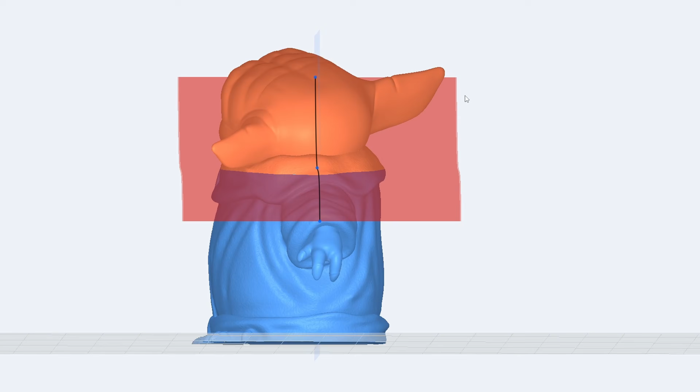This will be a quick video just to go over the updates to PolyCarver. If you're not familiar with PolyCarver, it's a tool I made to simplify the process of making curved cuts in 3D meshes before printing. I'll leave a card at the top and link to the video in the description.

Now let's go over what's new.

The first big update is that the Mac version is up and working. You'll be able to download it at the same place you can download the PC version.

The other big update is the mesh repair option. You can see this in the file menu. What this is going to do is fix any issues with the mesh when it's being cut or when it's imported, which was causing meshes to not cut properly and to not cap.

How long this takes will vary based on how complex your mesh is and how badly it's broken. For example, this Grogu mesh is about 500,000 polys. It's pretty dense and comes in originally pretty broken, so it takes about 2 or 3 minutes to repair.

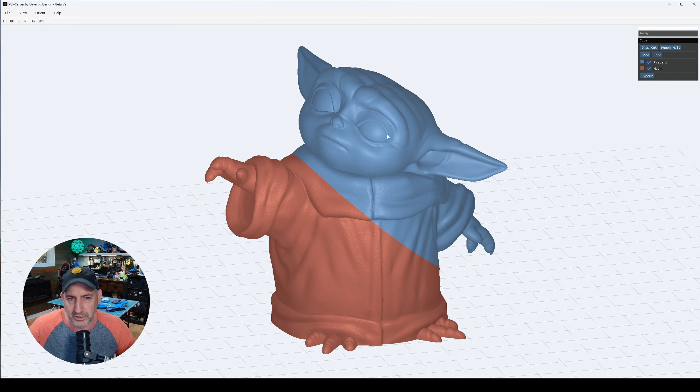But when I bring in a benchy, let's do that now. So you see here this pop-up when you load a mesh that is broken. It'll tell you what the issue is and ask if you want to repair it now or not.

If you don't repair it, you still have the ability to move around, but you just can't do anything. You can see up here that the menu is all grayed out and you're being asked to repair.

So if you just hit the repair button, it'll run through the process. Now the benchy, I think this takes 10 or 15 seconds - yeah, well, 6 seconds. So it's not that big of an issue. It's going to vary depending on your machine and what is going on with the actual mesh.

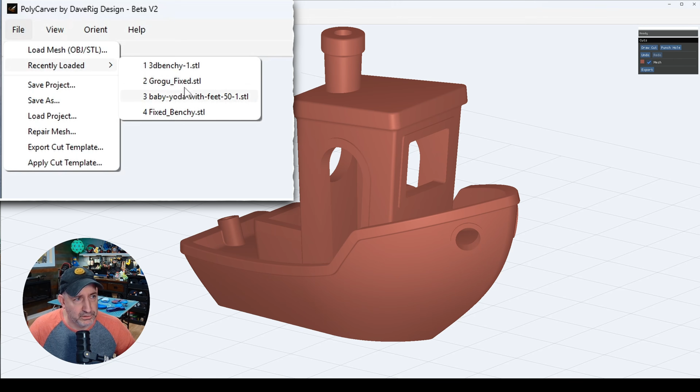Let me go back to another feature while here. I've added the recently loaded option, so it'll remember the last 5 meshes you loaded. It's also going to remember what directory you're in when you load a mesh, so you don't have to constantly be jumping back and forth when you're opening different files.

So first, let me make a cut here just to get 2 pieces. You can see I've also added a progress bar at the top, so you're not just waiting while it's processing - you can actually see what it's doing.

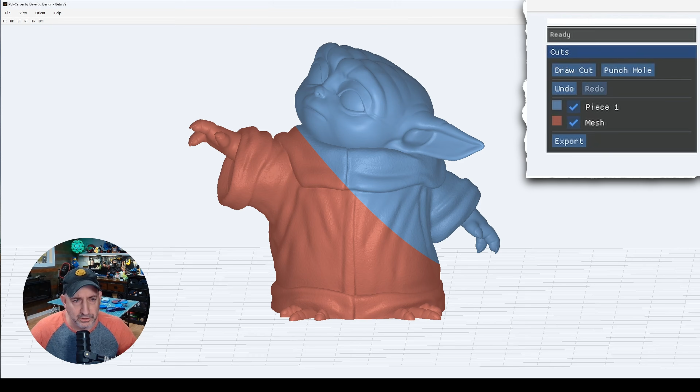But now that we have 2 pieces, I've also added that you can double click on the name and then rename each piece. And when exporting, it'll remember these names properly. Before, it was just reordering the names.

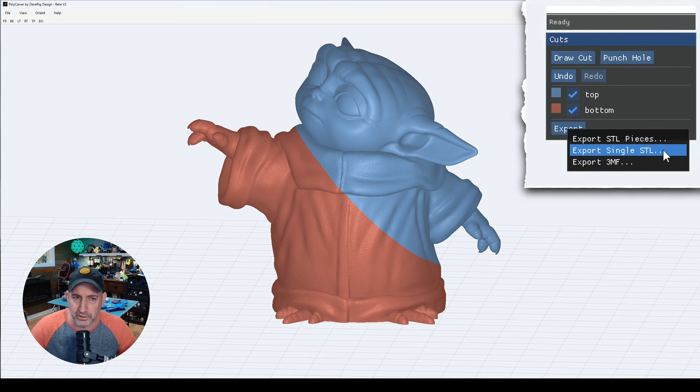Also on the export, I've added 3 different options. Export pieces is what the original had, where it'll just take however many pieces you have and export 1 STL per piece.

Export single will export it as 1 STL, but it'll keep all the different pieces, meaning that if you bring this into a slicer, it'll come in as one spot, but then if you select break to objects, it'll split it up to the pieces that you cut it to. And now you can also export to a 3MF file if you just want to load that into your slicer.

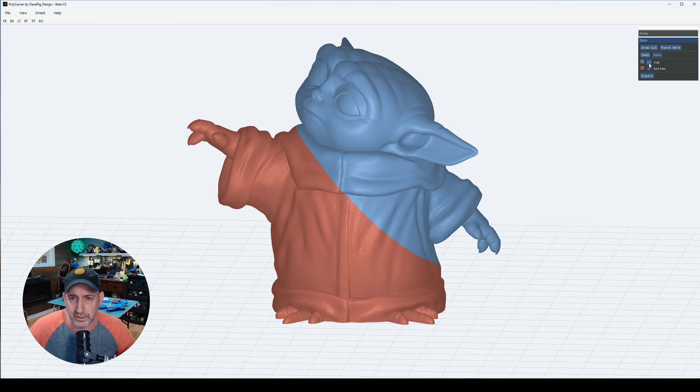Also, when exporting, it'll only export whatever is visible. So if you turn off a piece and now you export, it's only going to export the bottom - it'll ignore the top piece.

The other big addition is I added what I'm calling a hole punch or a cookie cutter that I think I'd mentioned in my last video. The way this works, when you select it, is just like the slicing option. You go into the punch mode and you have 3 options: circle, square, and polygon. We'll start with circle, and this, as you would think, draws a circle.

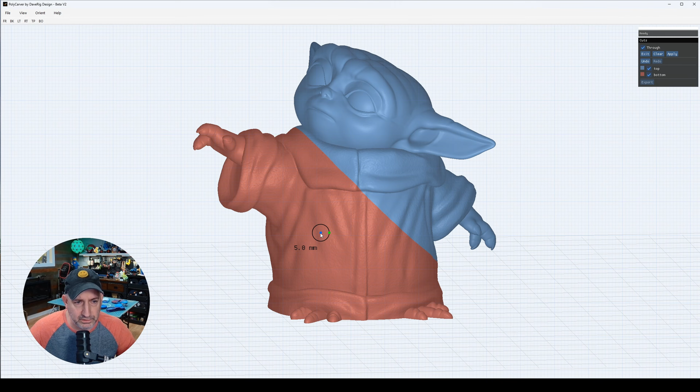Now the center dot, you can grab that and move it around anywhere on the mesh. And the green one, when you grab it and drag, it'll change the size of the actual circle itself, and you can see it's telling you what the physical diameter of that cut's going to be.

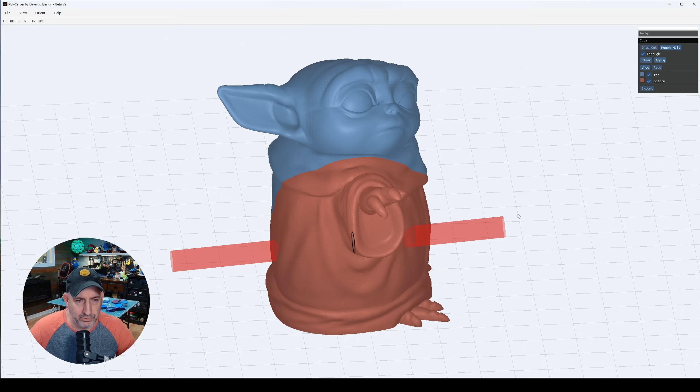So if we exit out, just like before, it'll draw where the hole is going to be punched through the mesh. But now I've also added the option to only partially cut through. So if we go back to, I can show you here, if I turn off the through option, so now it's only punching here.

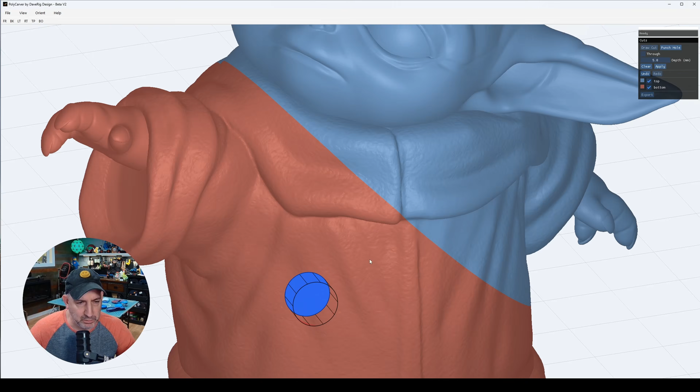It says 5 millimeters, so you can see the depth. That's a little hard to see from the mesh, that's why I'm drawing the kind of grid around it. I'll see if I can make this any better in the future, but right now you can kind of see how far it's going to punch into your mesh.

So if you wanted, you could come in here and change this, and you can see it update to how far. So now if we apply this, now you have just a partial hole punched in it.

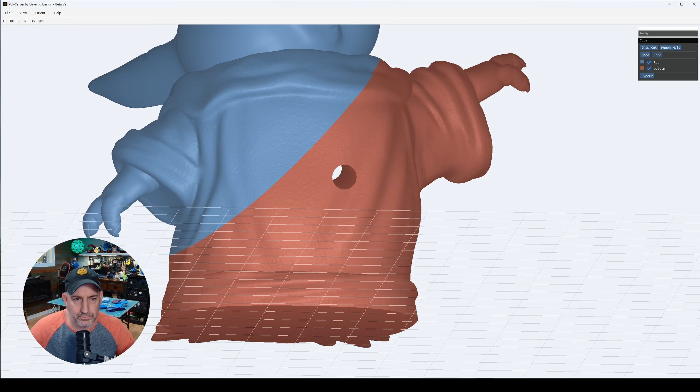Whereas if we go back and punch another hole but leave it all the way through, now it's punching a hole straight through.

Now looking at the square, it's very similar, except it draws a square as you would think. Same idea, you can grab the center part and move it around. You can grab each side and scale that to turn it into a rectangle, or grab the corner and scale the whole thing uniformly.

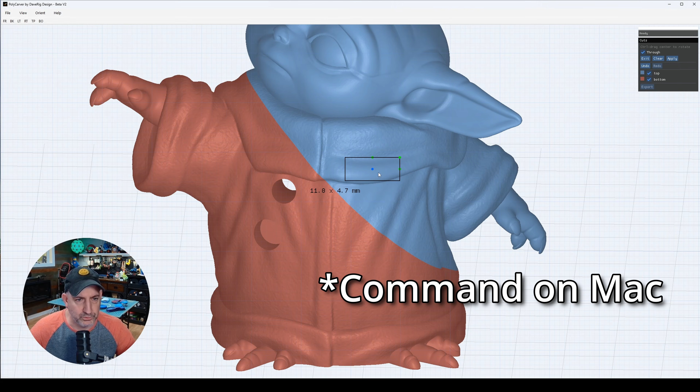Now if you hold control while clicking the center button and then scroll up and down, or move your mouse up and down, it's going to rotate it. So if you just grab the piece, you can move around the mesh, and then hold control, and as you move your mouse up and down, it'll let you rotate the mesh. You can move it like this.

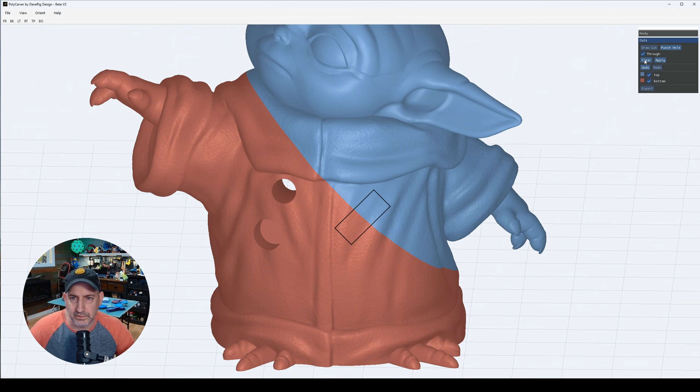And the same idea, that has the same through option. Let me exit, where it's going to do the same thing. It's going to project only partially into the mesh, or it'll punch all the way through. So we'll just apply that, and there you go.

And the last option is the poly, which lets you create a polygon as opposed to a geometric shape. So it starts as an octagon, or more than an octagon, but you can just grab each point and maneuver it wherever you want.

And if you click on this edge, it'll create a new point. And then also you can hit D to delete that point if you don't want it.

But this will let you, actually I think this is the example I mentioned in the comments of the other video. If you needed to, say, cut out an eye from a mask, from like a helmet or something, you can trace the exact shape you want, and if this is a solid mesh, say you only need to punch it 10 millimeters through, hit apply. Now you can see it punched out an eye.

So let me go over here and do it on this one. And then this one I'll let it go all the way through.

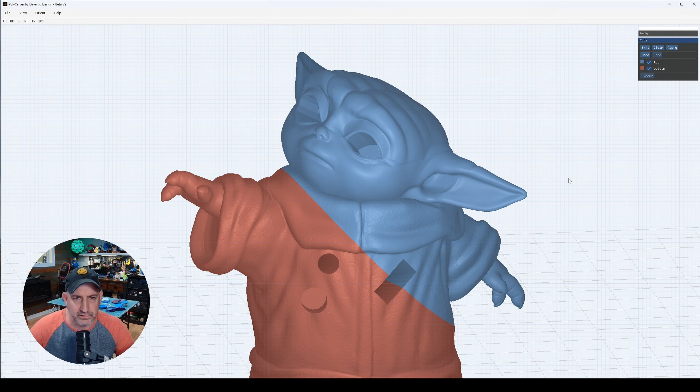Also, I don't know if you may have noticed when I was making the cuts, you can see this other grid pops up when you're in cut mode. This was something someone suggested, that when you're working on the same plane, you can have a grid as you're drawing your lines or placing your points, if you want to try to equally place things across, you have some kind of reference. And if you don't want that, you can always turn the grid off.

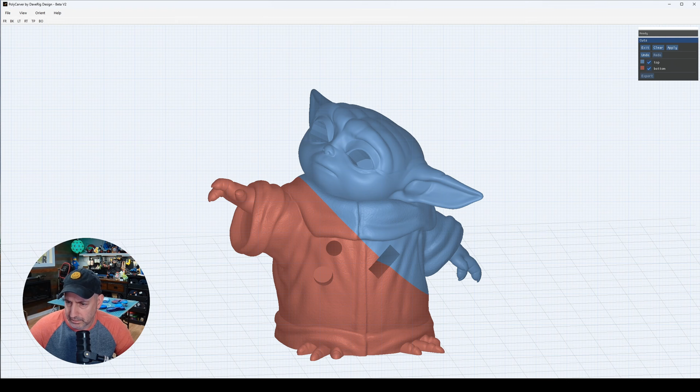Let me check my notes here. I think that is all the major updates. The big change really was the repair feature, because not only does it repair at the beginning, but it also repairs while you're cutting. I didn't get it in this case.

Let me load a Benchy and see if I can get it to pop up there, because sometimes when you're making cuts, it will create a problem when it's capping it, whereas before it would just show those errors. Now it'll actually repair the mesh after the fact.

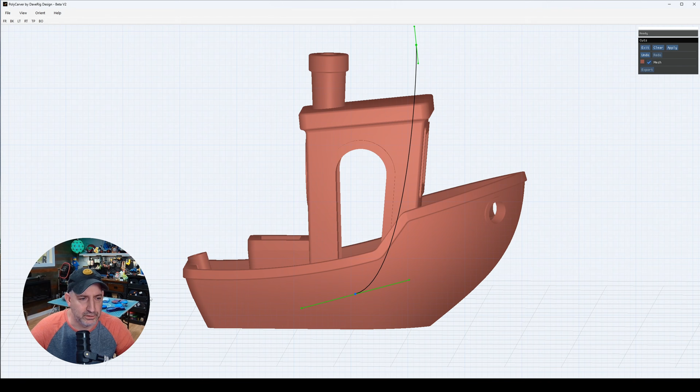So let's try, see if we can create an issue. There. So this cut, but then in the process of cutting it, it caused some issues with the meshes. So now it automatically detected that and will prompt you to repair. And again, you could say no and move around, but you can't proceed until you fix the errors before you can make more cuts.

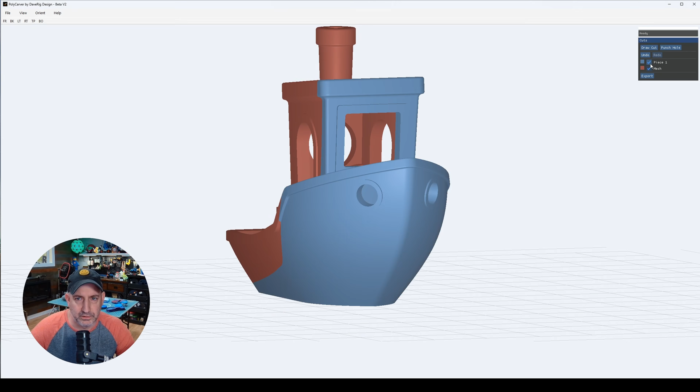There we go. So you can see both sides are correct. If you turn on the wireframe, you can see what's going on. So that's about everything.

For the Mac version, this also gives you the option to repair meshes, because most slicers don't allow you to do that, since they're using Windows-specific libraries in the slicers to do that. So this will give you the option to repair your meshes if you're only on a Mac, which you wouldn't normally have had. And I think that's all for now.

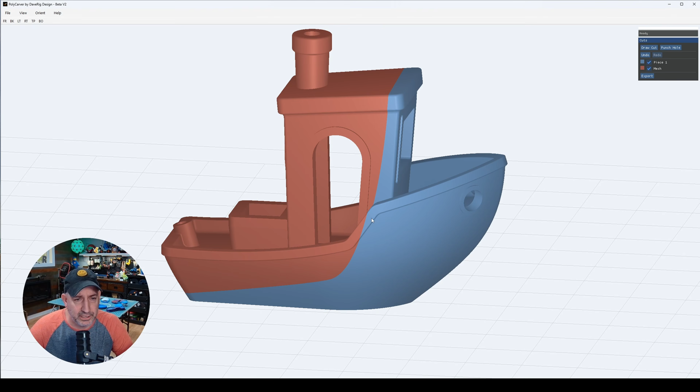So hopefully this update fixes some of the issues. I know adding connectors was a big thing that people were asking for. Now that I have the hole punching working, that is the next step. I've just got to figure out a good way of figuring out where to put the connector along the spline. But that'll probably be in the next update, along with a couple other things people had suggested.